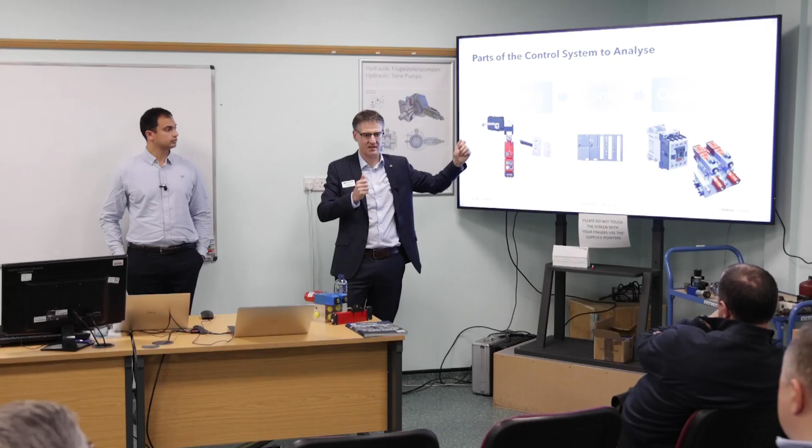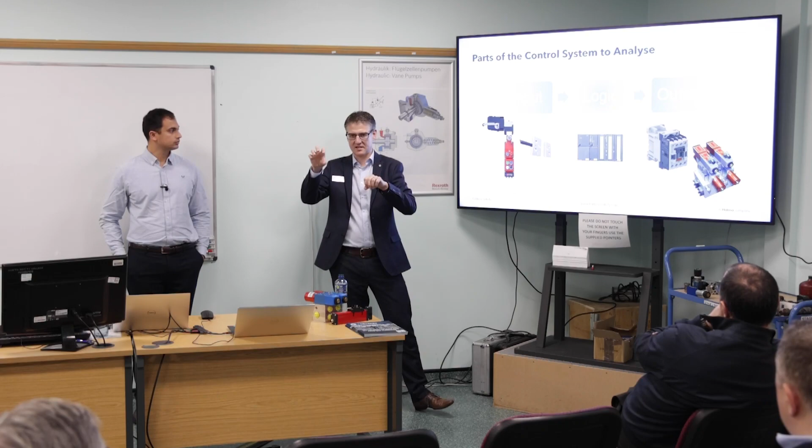If we look at some of the bits, we talk about the safety related parts. So you'll often find there's a separate piece. This won't just be using the sensor that is the usual end stop on something. This will have a separate piece, an interlocked guard, a safety light curtain. We might have a PLC that looks like it's all in one, but if it's Siemens, it'll have the little yellow flashes. Actually, within that box, there's two separate parts. There's the general control, and then there's a separate safety one. That's running a separate program, that's running separate checks. Maybe even it's a completely separate device, and it's a safety relay, as you can see out on our stand in the hall, that actually is running that.

And even if the control system goes mad, tries to do something awful when it's in there, we've got a separate way of controlling these outputs and making sure we've isolated that energy, that there's nothing going to happen even if the control system tries to do something while somebody's in that hazardous area.

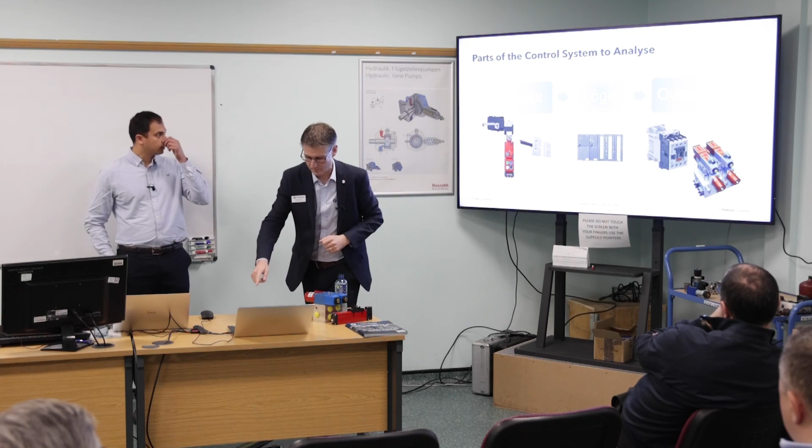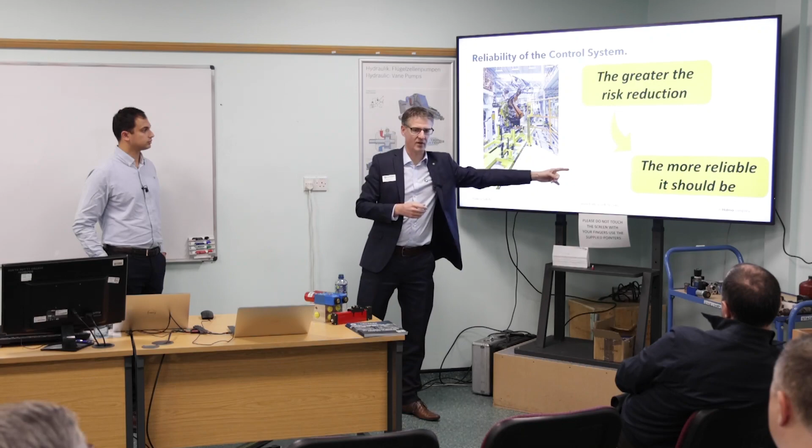And I think this is the point we made earlier, talking about that robot. Where is it? What is it doing? We talk lots about risk assessments, and all that is saying is what might happen and what's the consequence of that? How likely is it to happen? Is there a chance of somebody getting out of the way? And if it's a bad thing that's likely to happen more often, we've got to make that system reliable enough for people to trust that that's going to keep them safe. Otherwise, we're not going to be able to take any of those efficiency gains.

We're just always going to go off and isolate it, or we're going to end up in an even worse situation where somebody does trust something that isn't reliable enough to keep them safe. So I think now what we can do is go on and look at a little bit of how those concepts of having that input, logic and output go together, and what things we can do to make a system reliable, and how does that apply when it comes to putting valves or hydraulic power systems in there.

And so on the slide that Rob showed a moment ago, we've split everything out from that input, that logic, to that output. And the conversation that often happens when it comes to functional safety or the use of these control systems is that the folks that had to learn some of these topics first were those electrical engineers, those control engineers that were looking at those inputs, finding these new fancy safety relays a little while ago now, and thinking about the design of these systems.

We had a nice little discussion before the session about that interaction between different specialities. Do our mechanical, do our fluid power experts have that same level of awareness of the requirements, the expectations of those electrical systems? If we've done all of that work to make sure we've got reliable inputs and a hefty and reliable logic controller, but we failed at the last hurdle because we've not thought about how that system is going to control those fluid power sources, for example.

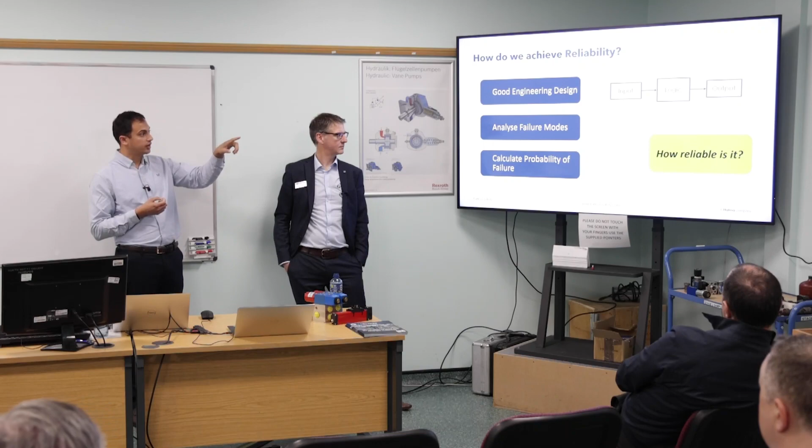But when we look at these simple diagrams, if we had just one input device talking to one logic device, talking to one output, we need to think about what those possible faults can be, and also whether we can detect them. Even if we have really reliable individual components, there's lots of other things that could cause issues, cause faults, cause some pretty upsetting situations. I sometimes make the comment that it doesn't matter how reliable your components are, if you connect them together with some pieces of wet string, you can quickly foresee that there are things that could go wrong there. And it's about taking that awareness when we look at some of those systems.

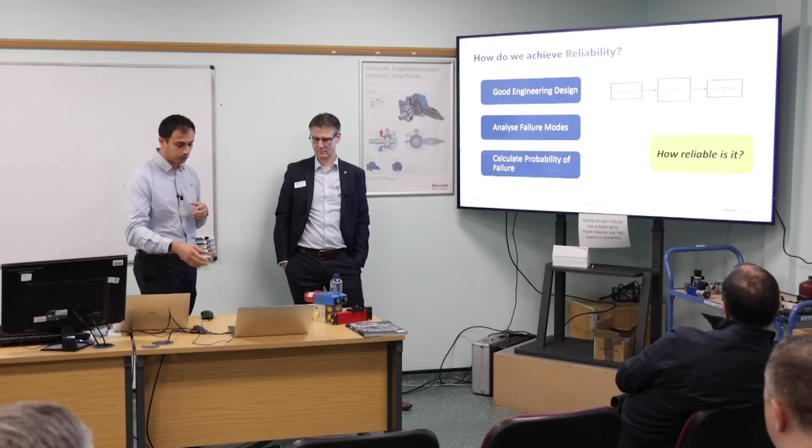So if a really basic system could be an input and a logic and output, how does something with a higher level of reliability account for some of the faults that we might see? So things have got a little bit more complicated. And again, this is still a simplification of some of the topics that we need to understand to really know how to apply functional safety. But straight away, we've doubled up on a couple of things. What does this allow us to do?

By having two channels to communicate information, we're more confident that we're going to essentially send that message. How do I know whether that contactor has turned off? Well, if I'm sending that information to two contactors, at least one of them should get that message. I'm going to have that redundancy to make sure that I execute, again, what we call that safety function. I've got an input, I'm processing that information, I want something to happen to those outputs.

So, thinking about dual channel, and maybe that's a term that some people have or haven't heard before, is, I guess, one of the fundamental levels of understanding why redundancy may be needed. And again, in an electrical context, we've been pretty comfortable with this for quite a while. When it comes to those outputs, though, what does that mean when it comes to fluid power? Can I reliably control those energy sources as part of that full function?

The other bit is that we've gone through sometimes considerable work, expense, review, technical time and investment to get that redundancy. We need to be able to detect if something has gone wrong. Having that redundancy but no way of monitoring or discovering whether something needs to be addressed isn't particularly helpful. And we'll see that in a little bit.

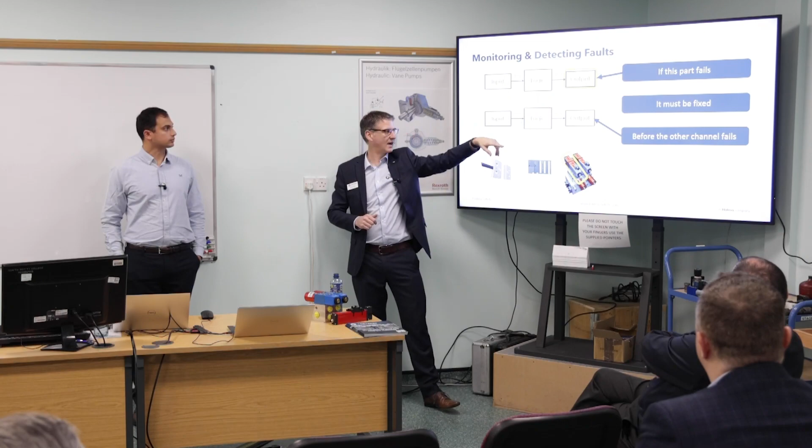If we then find that the debris that's in the media that's caused this valve to stop shuttling properly actually works its way round, and also there's some dirt in the media that gets to this one, it's going to stop as well. And quite often we find those incidents happen relatively close together. If we don't have that monitoring, all you've done is made it marginally more reliable. You've just put off the inevitable for a little bit longer.

So we need to make sure that not only do we have redundancy, but we have it all the way through the system, right up to those valves, to those actuators at the back piece, and you have monitoring feeding back in, whether it's from the inputs, comparing, yes, both switches went at once, or whether it's on the outputs, yes, both contactors went, none had welded, or both spools have shuttled within that valve.

And we can see that exactly with the sort of devices we have here available at the moment. So here, pretty simple stuff, and I'm feeling a little bit at the wrong end of this because Fortress knows lots about functional safety. I suspect there's a lot more people here today that know a lot more about hydraulics and pneumatics than us.

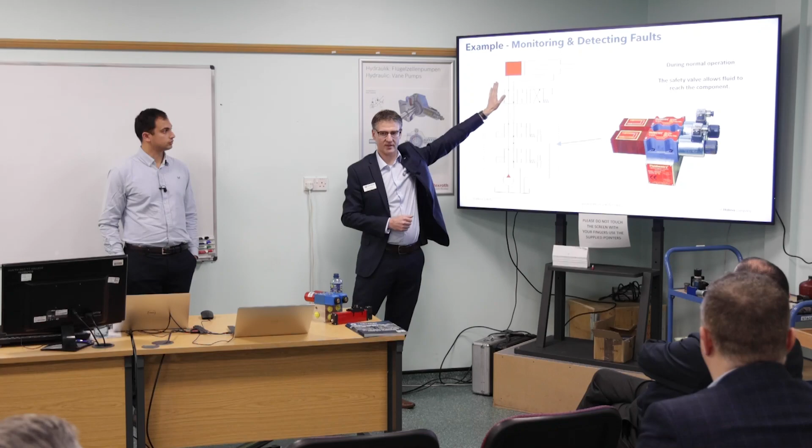But at a very simplified level, we've got here a directional control valve operating something in and out exactly as it would be. All we've done now is added that safety valve at the front, effectively like we have the control relays operating and a main contactor at the front end. It's invisible to the system as it runs. When we're operating normally, this goes through, the directional control valve decides where the ram sits, and then bleeds it back through to tank. All working fine, no problems at all.

What we now have is that safety system has operated. Maybe something's gone wrong in the control, so we're still trying to drive this cylinder. But what we've got here is that input, that control. So we've opened a gate, the logic has picked it up, and now we've driven that safety valve on a completely separate hardware system into the safe state. So here we're blocking that pressure coming in, and everything else is bleeding back to the tank.

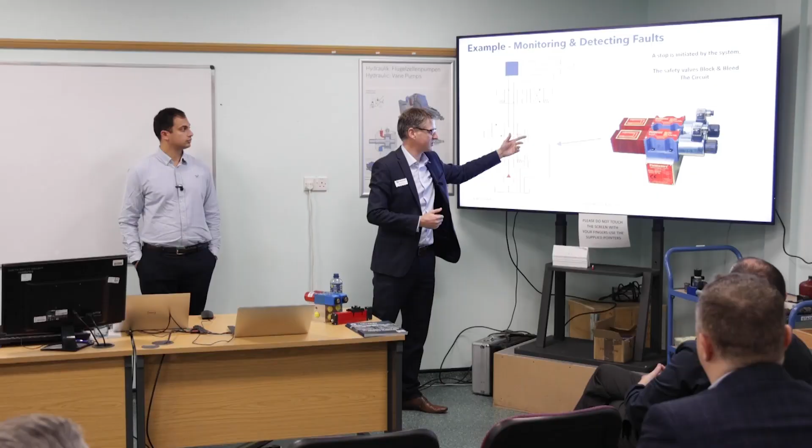So we've taken away that hazardous energy that might be compressing. We've taken away the chance of a hose burst and spraying things onto a fire. We've taken away the chance of a leak and a fluid injection because we've drained away all of that hazardous energy, just like you would be turning the ball valve there. And of course, we've got this monitored with the switches on the back end, so that's going back into the control system to know that's happened.

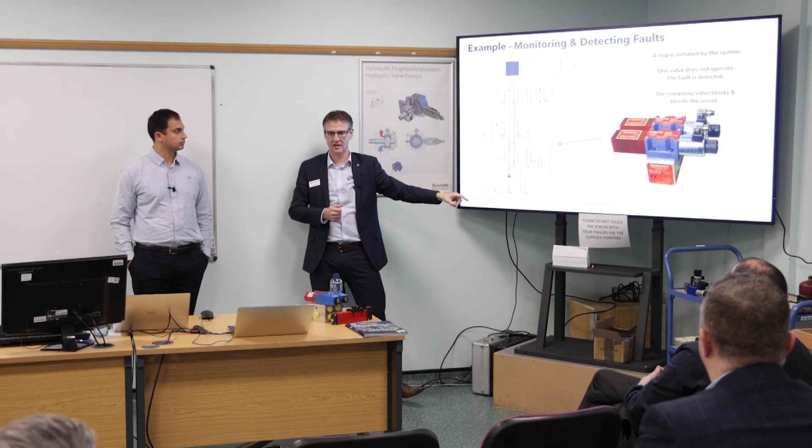If we have that same situation now, but we go back to that dirty media, something's got in there, there's some debris that's stopping that valve spool moving in the valve. Well, now we've still got this first one passing through, but we do have that redundancy. So if we trace it through, pressure's passed through, but we're still blocked at the second valve. Pressure already in the system or anything accumulated up here is still coming its way back through. It's bleeding to tank here, it's passing straight through and still back to tank. So we've still achieved that same level of safety.

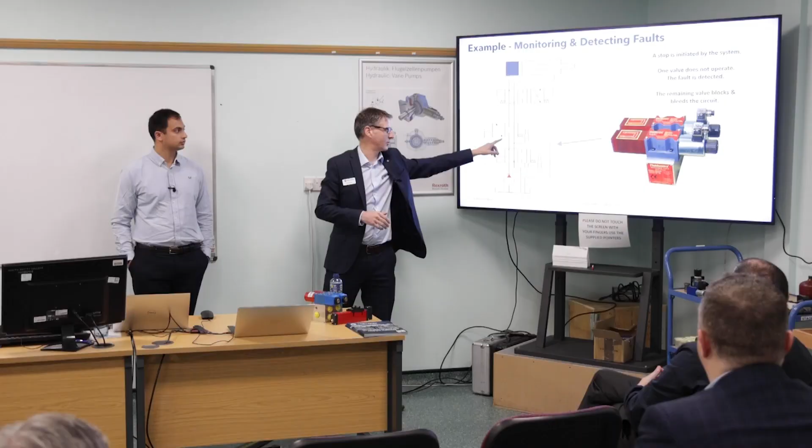But what we also do is know we have these switches, we have that monitoring feeding back into the control system to say, I'm not going to allow you to reset. I'm not going to allow you to put this back into the running state because I know something is wrong until you go and service that and show me that I can operate both of those and use that redundant channel next time. That system's not going to allow you to go back there.

Suddenly I'm feeling a little bit happier about putting my hand into the jaws of that press under this system than I was back when I thought any bit of dirt in the media is going to stop this and allow that to happen as it goes through.

And that's exactly what we do. This isn't a big complicated piece. We've talked about lots of standards. We've said there could be lots of calculations on the back of here, but this is not a difficult thing to implement. All we've done is effectively put an invisible piece of hardware back and fed it into the control system.

There's a really nice segregation. If we go back to this one, we talked a little bit earlier, and Matt mentioned it, that segregation between maybe the hydraulics falls under the mechanical team, but that safety system falls under the electrical team. If you draw a little line down here, the electrical team is very used to working with redundant switches on their contactors on all the other pieces. A little bit of pipe work on this side seems pretty standard stuff for the hydraulic engineers. We can separate that piece, still have it in there. In terms of the system, it operates pretty simply.